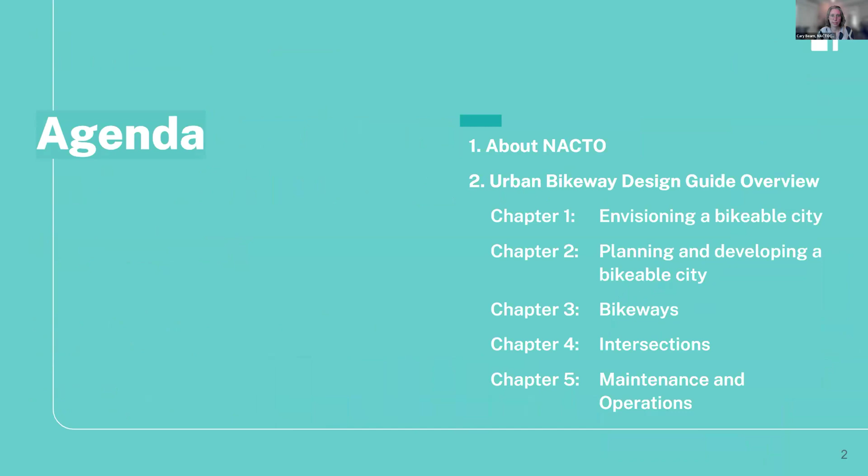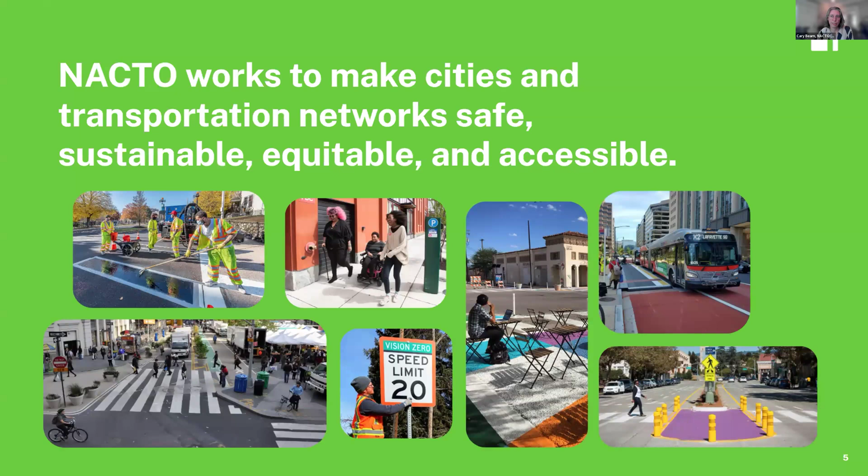NACTO stands for National Association of City Transportation Officials. NACTO is a membership organization of almost 100 transportation departments and transit agencies across the US and Canada. We work with our members and with staff at cities to make their transportation networks safe, sustainable, equitable, and accessible.

At NACTO, we do this by convening, by hosting conferences and workshops. We do this by collaborating, by facilitating fellowships and discussion groups. We do this by curating - that's where we write design guidance like the Urban Bikeway Design Guide, but we also have other design guides and other reports and practitioners' papers. We do this by communicating and elevating city voices in the broader media.

If you are interested in getting more involved with NACTO, especially if you work at a member city or agency, please look into joining us at our conference at the end of May. Registration for that closes at the end of the month, in about a week. It's a great opportunity to learn more about what's in the Urban Bikeway Design Guide, as well as a lot of other things cities are focusing on across the US and Canada.

But what we're focusing on today is what is in this new 3rd edition of the NACTO Urban Bikeway Design Guide. It's been a little over 10 years since the 2nd edition was published, and this is a really comprehensive update. It goes into a lot more detail on topics that were in the previous edition, and it also adds a lot of new topics that had not been previously covered in the last edition.

The guidance is centered around bikeways, and as the title says, it's definitely a bikeway design guide, but there's a lot of guidance that applies to streets in general and making streets safer and more accessible for all users.

The book comes in at just over 400 pages, which is not quite double the length of the previous edition. There's a lot of guidance that's updated to previously published documents, and a lot of new material.

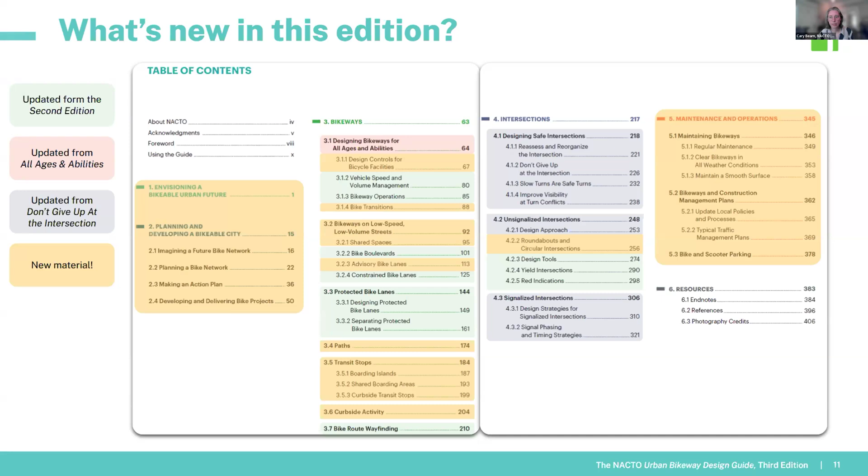Okay, so diving deeper into each chapter. Chapter 1, Envisioning a Bikeable Urban Future. The first chapter sets forth a bold vision for a bikeable city, a city that's vibrant and equitable, economically strong, safe, and sustainable.

But beyond setting the vision, this chapter, and really the entire guide, makes it clear that it's not enough to just say that biking is an important part of the vision. This chapter is aimed at leaders and supporting them with strategies for meaningfully and productively investing in these visions. Updating streets that have not been changed in decades is hard work and requires real leadership.

Organized into 3 categories, investing in organizational capacity means building systems that make the work easier each time. So think about a time you had an administrative or organizational challenge. Have you had that challenge more than once? Was there an effort to address the challenge, or has it just been accepted as part of the process?

Did you tell your leadership about the challenge? Was it addressed? How do you wish your leadership would have handled it? This guide supports strong leadership decisions in addressing these challenges and investing in organizational capacity to make the work easier each time.

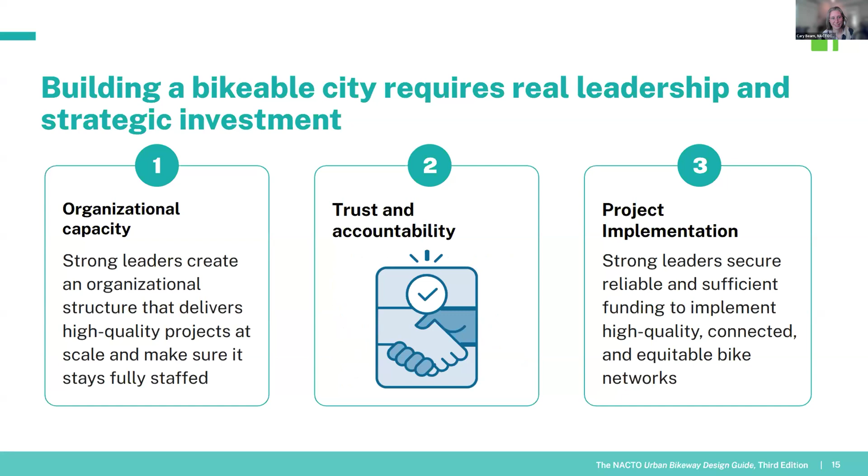Okay, chapter 2 on planning and project development. We're going to be going through just some high-level things. There's a lot in this guide, but moving right along. To build a bikeable city, the bike network needs to be planned strategically and equitably. Not every bike route in a city will serve the same function, and it's important to consider that function when designing bikeway features.

Is a bikeway segment going to be a critical link for the network? Will it be the busiest segment of the network, or will it be an extension into a community that serves fewer people? All those contextual elements will impact design and planning.

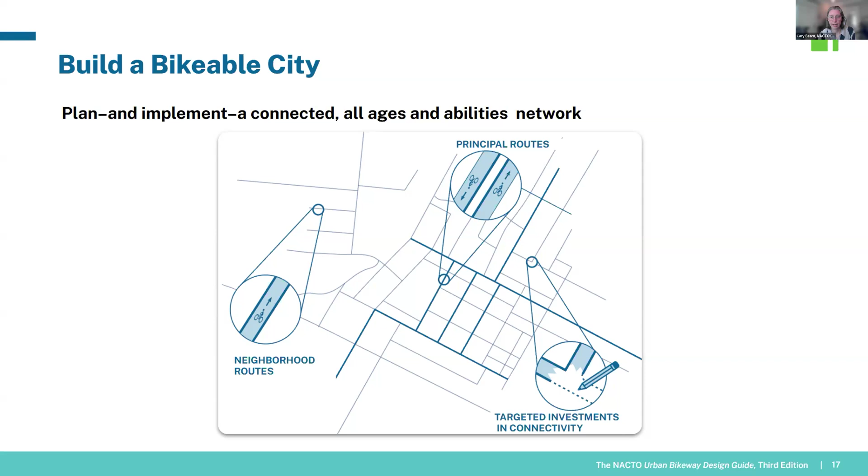This third chapter, the Bikeways chapter, includes a lot of information, of course. I think of it as the mid-block chapter versus the intersection chapter, which is next. And this is where the second edition, the last edition of our book, really started.

So one of the really important updates in this edition was all of the policy, the programmatic, the project development guidance that I've just gone over at a very high level. All of that material, all of the first 60 pages, is new to this edition, setting up the designer for understanding the important context behind the decisions of the technical details.

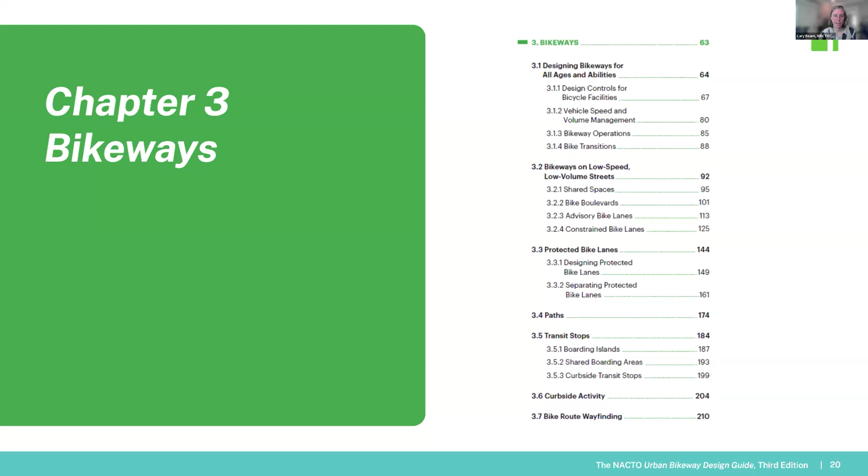This chapter doesn't just jump into facility design details. It starts with foundational principles. We need to design for comfort, and we need to design for the least confident rider, which does not preclude use by the most confident rider. We also need to design for growth.

All ages and abilities bikeways should appeal to current riders and potential riders. They should physically accommodate busyness, wide bikes, and speed differentials, and not just physically but comfortably accommodate that. They should use lasting infrastructure where it matters most, where the most critical safety needs are, or where the most critical gaps in a network are.

We use this term all ages and abilities bikeways. These are designed as safe and comfortable for people of all ages, sizes, physical abilities, and experiences. High quality, connected networks go beyond that by creating a sense of safety and helping people feel as though they belong in a space, that they don't need to ride on a sidewalk, and that they're less likely to have a potentially dangerous interaction with police officers for breaking some standard or legal framework.

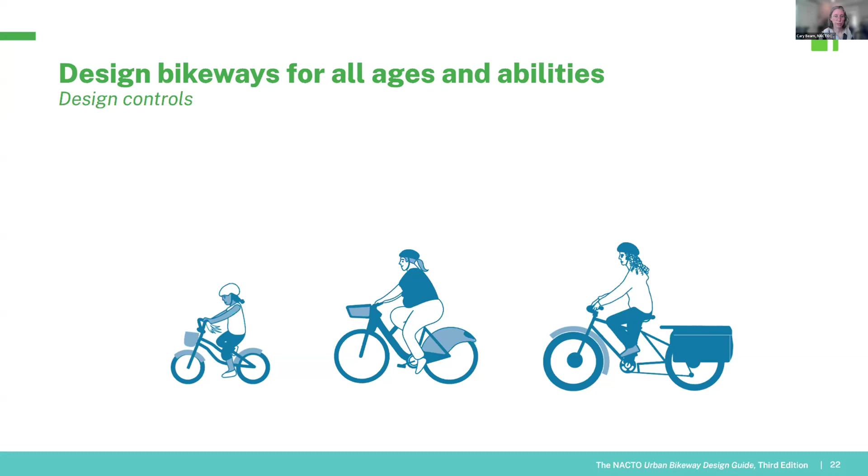Each rider comes with their own backgrounds, identities, preferences, and physical bike size. We need to design not only for the physical space of the bike, but also for the comfortable space of the rider.

A close pass where someone whizzes by you, or a narrow pinch point along a bike corridor, is likely okay once in a while. But if it happens every ride or multiple times a ride, it could be enough to stop a less confident, or even more confident, person from riding.

When thinking about what is comfortable in terms of passing, we need to consider that we all have a minimum and a preferred riding envelope around us when using bike corridors. We have this in all spaces we interact in physically, and different people have different comfort levels with people and objects entering their space.

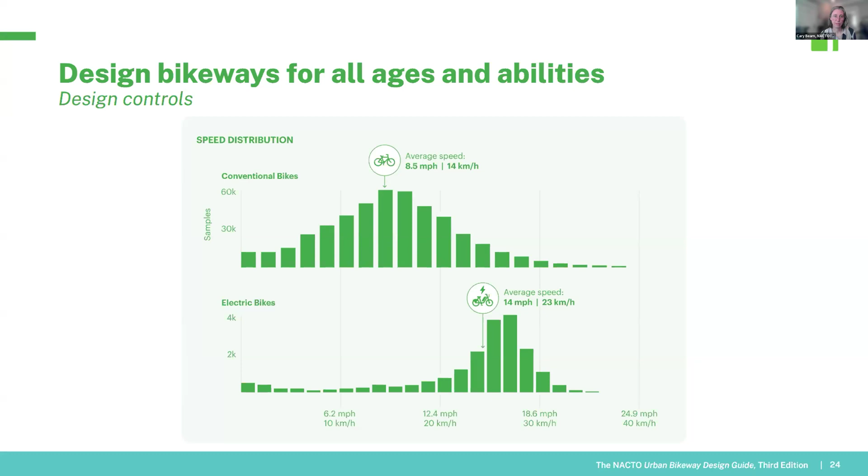The speed we are traveling will impact this comfort, and the speed others are traveling will impact it too. The more speed differentials we have, the more frequent passing occurrences will be. If everyone rode the same speed, no one would ever pass each other. The more frequent faster riders are, the more slower riders get passed, and the more important it becomes for these passing interactions to be comfortable.

If we know that a variety of people riding with different comfort levels and speeds are going to be using a corridor, we need to think about the implications of what it feels like to be passed and to be passing.

People's riding envelopes change based on a lot of factors, and you can see that on any group ride as people ride next to each other—riding farther apart when no one's around, and closer together in crowded places. That's not to say crowded moments prevent riding or totally degrade the experience, but the more those conditions exist, the more stressful a ride becomes.

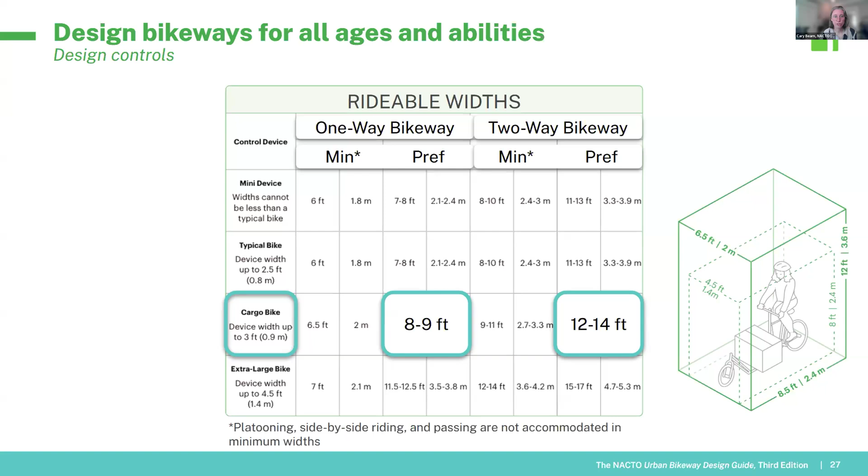I use this term rideable width. Rideable width is a little different from clear width and a little different from marked bike lane width. The rideable width is narrower than the clear width because it does not include the shy distance from curbs and other barriers—we don't expect people to ride right next to a curb or barrier. Rideable widths can be narrower than a marked bikeway depending on configuration, but the marked bikeway could also be unimpacted by the shy distance.

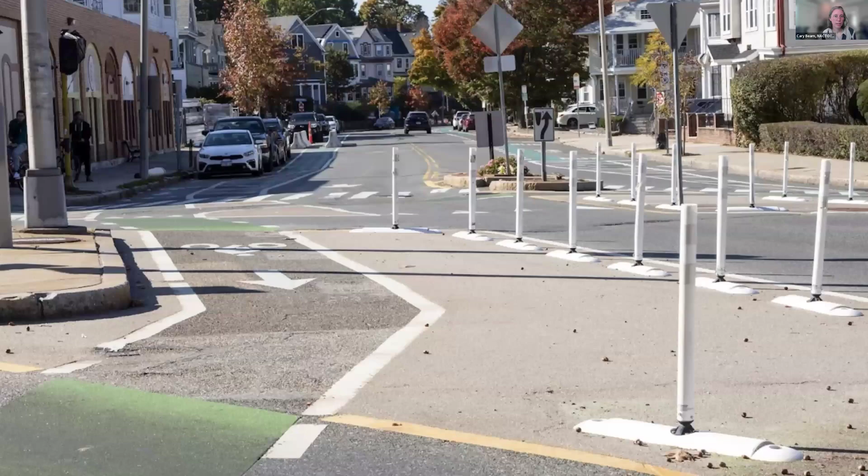Here is a parking protected bike lane with a smooth transition along the curb. You can see the rideable width is wider than the marked area for the bike lane. And through intersections, the placement of the barriers is really outside of the bikeway to delineate the motor vehicle travel lane and does not impede the bike lane at all.

So when it comes to thinking about rideable width and bike lane width and designing these widths, the most critical thing is to always place the barriers to ensure you have sufficient rideable width. You can do that in a lot of different ways depending on how your buffer is configured.

Now that we understand how to think about the rideable widths of bikeways from within the bike lane, we also need to think about what type of bikeway or facility type to select based on the stress and conditions outside of the bike lane, or the motor vehicle context. Protected bike lanes are really the only option along high speed, high volume, multi-lane streets.

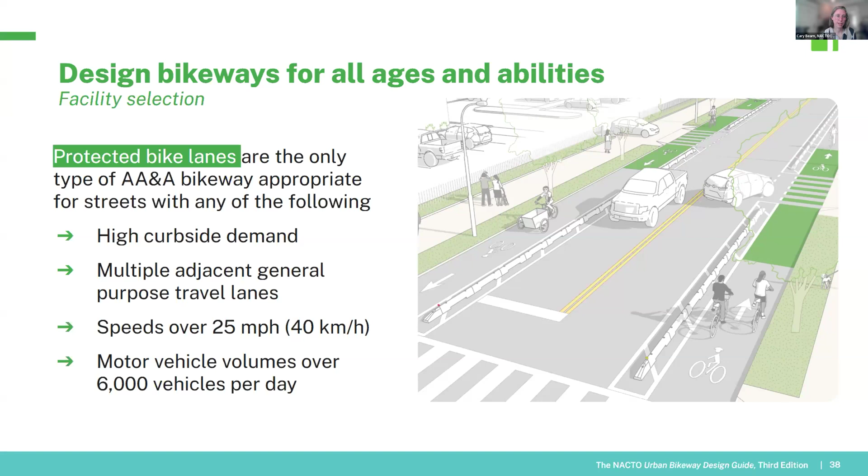If you have any street with multiple lanes, or high curbside demand, speeds over 25, or motor vehicle volumes over 6,000 per day, we're recommending that for an all ages and abilities facility, you need to create the space for a protected bike lane.

The chapter has lots of facility guidance for protected bike lanes and other facility types, but the emphasis in this book is that designers need to use this more technical guidance alongside the design control thinking I just went over—thinking about all ages and abilities rideable widths, considering future potential volumes and speed differentials occurring in a facility, and considering the role the project plays within the network.

All of this comes together to make informed decisions about expanding and connecting an all ages and abilities bike network. This is not a plug and play or one size fits all design guide about putting in certain dimensions and calling it a day.

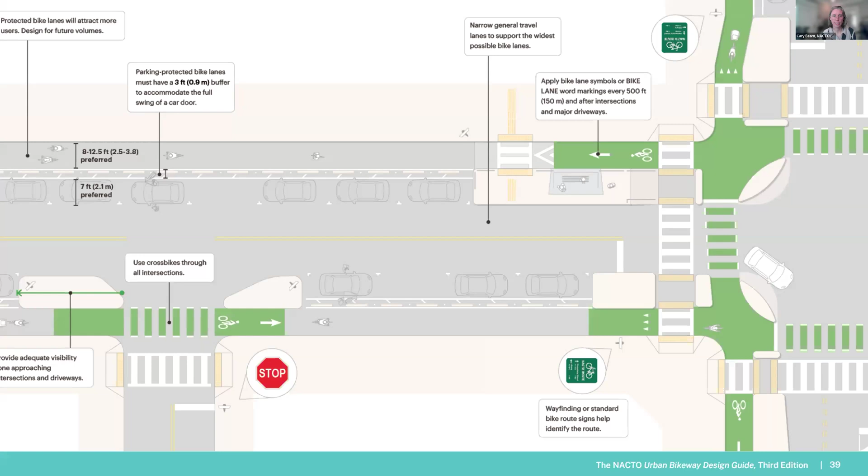Importantly, a street's speeds and volumes are not fixed, and other facility types may make the most sense along low volume and low speed streets. We have lots of guidance here about traffic calming generally and traffic calming specific to bikeways, but traffic calming can and should be part of bikeway design.

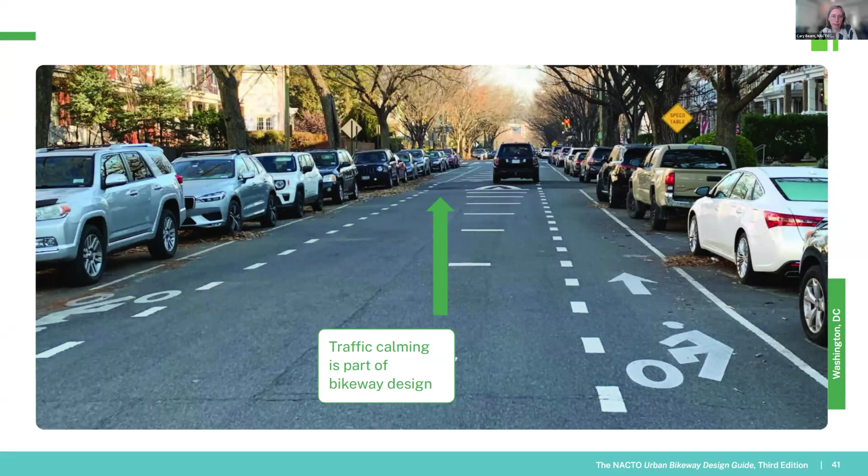This is an advisory bike lane facility type included in our design guidance here, which is appropriate only with low volumes and low speed streets.

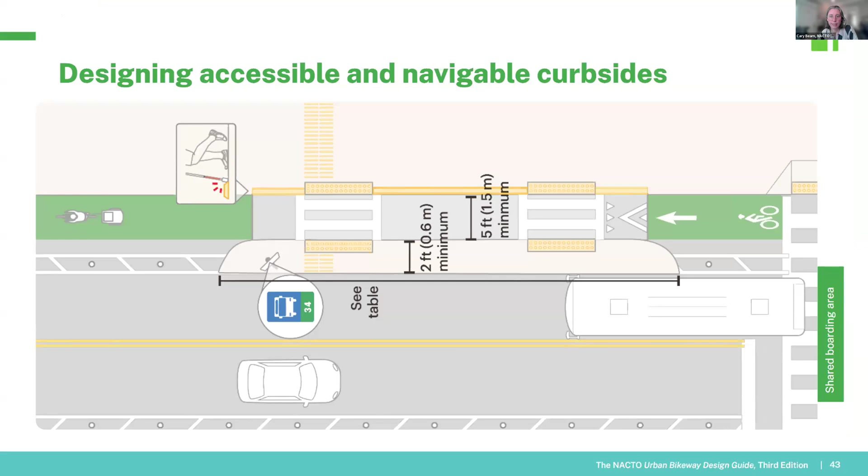We also have guidance in this chapter on continuing bikeways past on-street accessible parking spaces along parking protected bike lanes, really supporting the need for accessible and navigable curbsides.

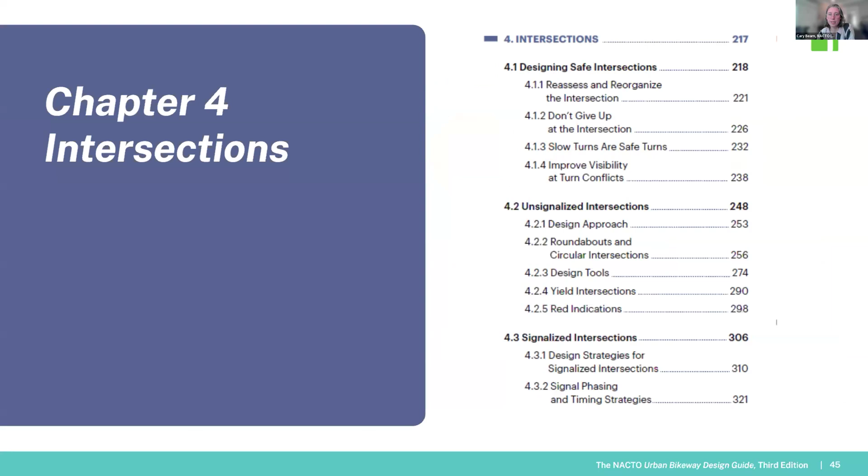Chapter 4—whereas chapter 3, the bikeways chapter, was the mid-block chapter, including the facility types and other features like bus stops and parking—chapter 4 is the intersections chapter, covering intersections of all sizes, like bike boulevard crossings, roundabouts, signalized intersections, and the like.

There are 4 critical principles to intersection design, of all sizes. The first principle is to rethink the intersection and reassess your priorities: what turns need to happen where?

What directions of motor vehicles need to be accommodated? How much delay is acceptable? What is the real priority at that intersection?

We also need to provide distinct paths of travel, making it clear who goes where with what priority. We need slower turns and slower approach speeds, which are critical for safe interactions at intersections. And we need to improve visibility, making sure everyone is mutually visible and has time to react to unexpected behaviors.

A safe system approach uses design tools to minimize the severity of crashes so that mistakes are not fatal, but we cannot expect to eliminate every single potential conflict.

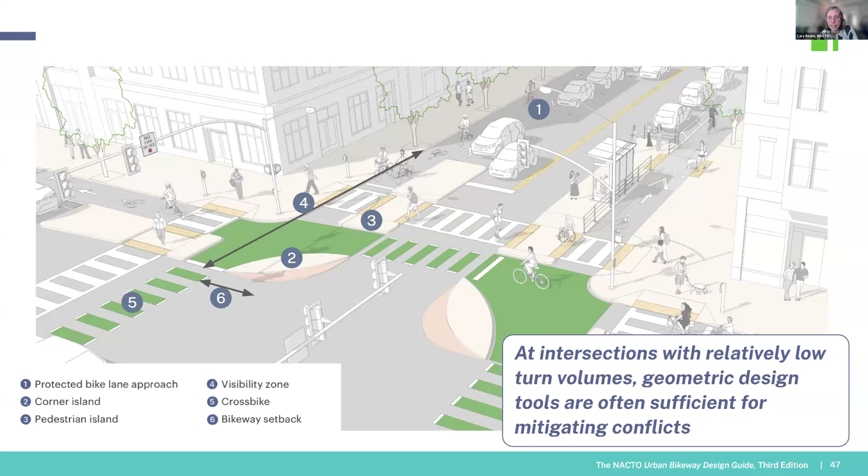For example, the protected bike lane approach and the visibility zone, shown with numbers 1 and 4, support mutual visibility among users. The cross bike markings, number 5 on this diagram, provide a clear path of travel for bikes through the intersection. And the corner island and bikeway setback, numbers 2 and 6, improve visibility and reduce turn speeds.

But at busy intersections, signal timing strategies can fully or partially separate turning vehicles from conflicting bikeway movements, and this edition includes some contextual guidance on when and where to use that phase separation.

I think this is a really exciting piece of our design guide, and we have a training at our conference in a month called Designing Bikeable Intersections, where we will get into more of the detail behind the thinking of this kind of technical guidance.

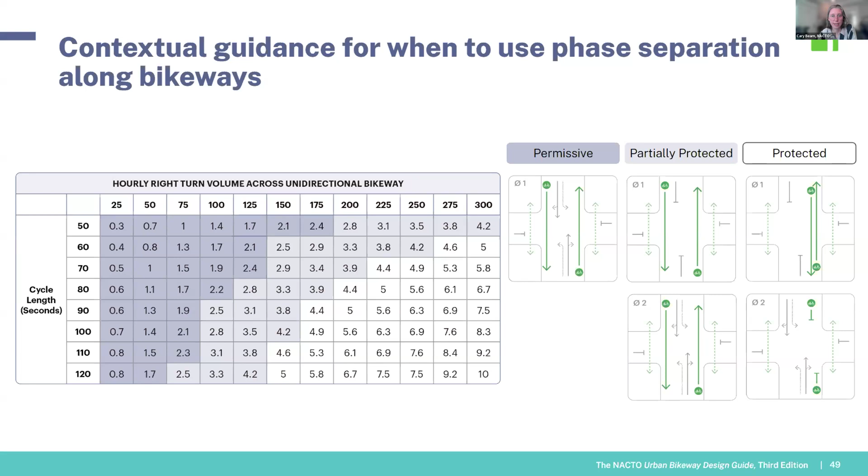But finally, we wrap up the guide with a chapter on maintenance and operations. When it comes to keeping bikeways clear, we really have to think about how these practices will be iterative. We can't let perfectionism impede progress, but we can continue to expect better.

So when we start small, we evaluate and we update protocols. That's how we build these practices into our work. And collaboration across teams is essential for this.

Leveraging expertise of people in all departments will identify locally preferred practices. And as we progress with strategies for keeping bikeways clear, it's important to celebrate success and communicate challenges transparently to continue to build that trust.

Of course, all materials require some amount of maintenance, and we need to, as designers, try to anticipate maintenance needs during design. That means considering the speed and frequency of potential traffic incursions, and it also means understanding the implications of existing conditions.

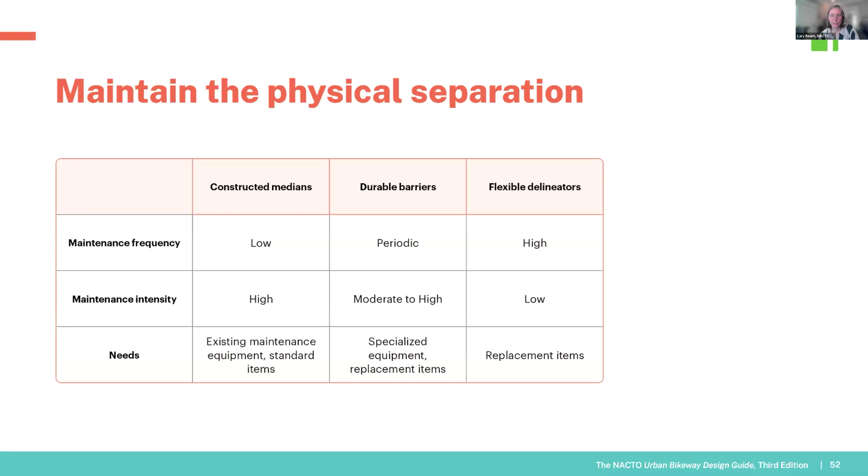And that we should never be intensifying inequities. In other words, don't let a bikeway fall into disrepair in an area that has already been disinvested in. We need to invest in better protection and more frequent maintenance where it's needed, and that might be to address inequities, or that might mean to harden protection along a high volume turn corner.

Finally, we as a profession need to do a better job committing to keeping bikeways operational during construction and other closures. This chapter supports with guidance on policies, practices, and designs that address a variety of common closures.

And although individual closures are temporary, we can remember that construction itself is not temporary, and it's instead a permanent condition with temporary location. So investing in these practices and policies is a long-term strategy for keeping the network clear and connected.

Okay, that's the guide in a pretty small nutshell. And I want to close by emphasizing that this edition is more than just a set of dimensional requirements that get put together to create a facility, but instead this guide is a blueprint for thinking really critically about designing streets for people, addressing the needs of a location, and selecting the design tools most appropriate for addressing those challenges.

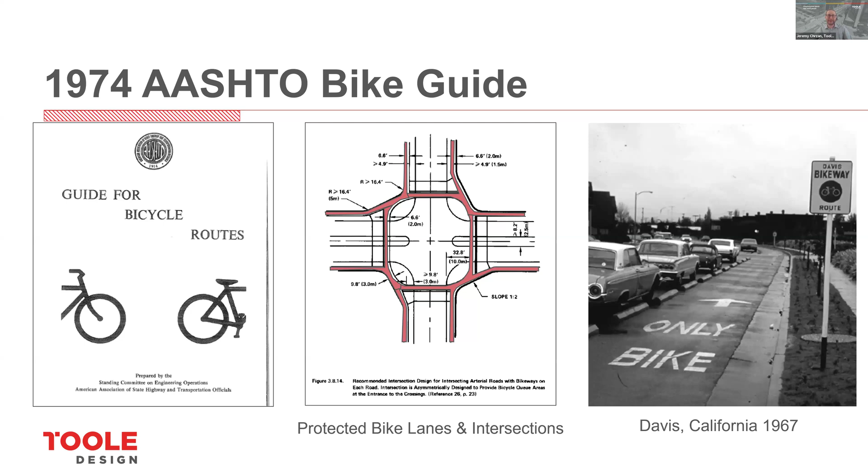Why is that? The 1974 edition of AASHTO actually had a lot of the things that are included in this guide, like parking protected separated bike lanes and protected intersections. It highlighted that you shouldn't drop bike lanes at intersections and you should mark bike crossings. It talked about the benefits of two-stage turn boxes and protected intersections to mitigate right hooks.

But unfortunately, vehicular cyclists got upset with some of the mandatory use laws that were also being enacted and felt like they were losing their right to the road. And they got heavily involved in the AASHTO process. So when the 1981 edition came out, all of that good stuff was removed in favor of things like wide outside lanes.

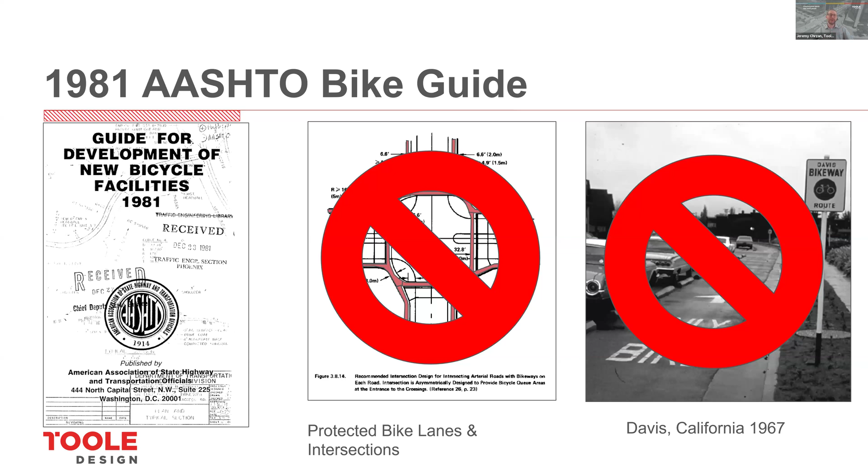But as we kicked off this project, both NCHRP and AASHTO gave us guidance that this document needed to meet the needs of people who either can't drive or choose not to drive, while also recognizing that we needed to be flexible to the individual communities and locations where these facilities are being installed. In short, our design user is changing from that highly confident bicyclist to people of all ages and abilities, or what we referred to as the interested but concerned bicyclist.

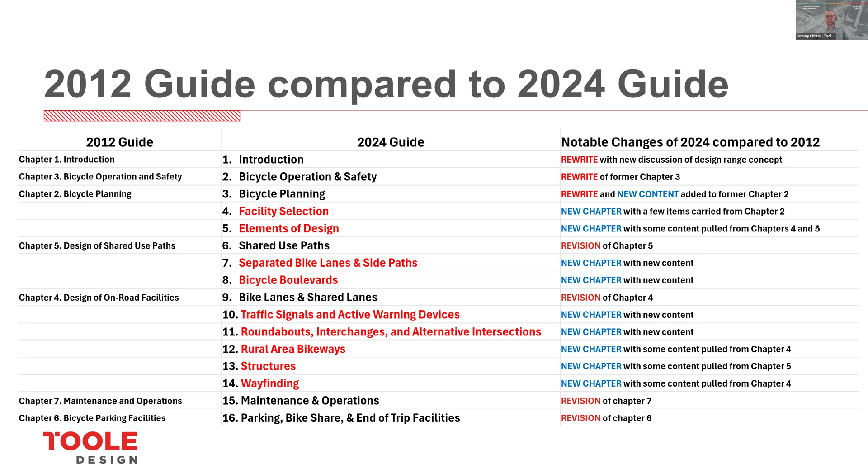So jumping into the guide itself, this is the structure or layout of the guide. There were a lot of changes since 2012. We did a lot of revamping of the structure of the guide, really with the focus on making this more usable for practitioners. There are 625 pages of content, so the length of the guide did increase, with 9 new chapters. But all of that extra pages is not just text. We also have 3 times the number of figures, so 230 figures in this document, and 2 times the number of tables and charts, again, to put details right at people's fingertips and make the guide easier to use.

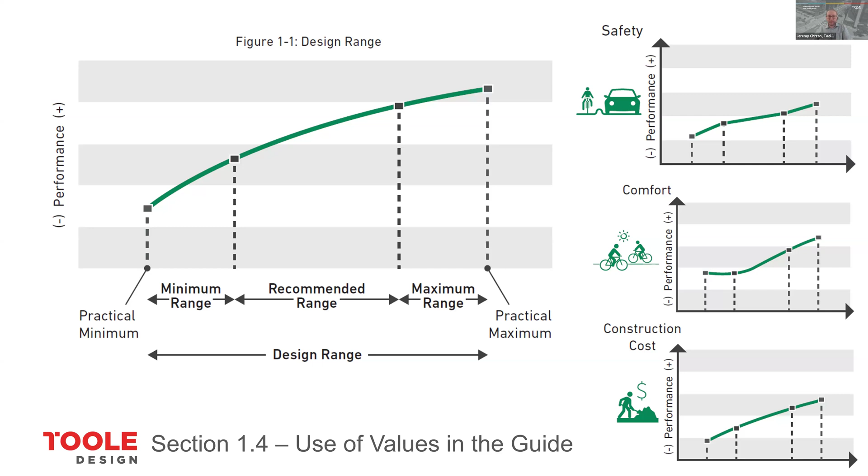So let me just jump right in. Chapter 1 provides the introduction to the guide. Please do not overlook this chapter, as it really does establish the framework of all the content that follows. It talks about our approach to design values that are used throughout the guide and this concept of design range, and that really designers should be picking values in a recommended range while also understanding the flexibility they have to deviate from that. So we make it very clear that selecting values in the minimum range is likely to diminish mobility, safety, and comfort. So it is something that we can use in a constrained condition, but is not our default.

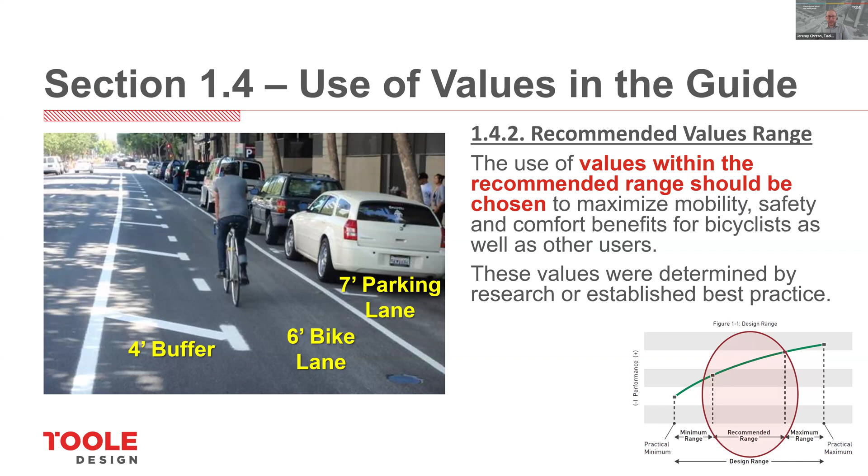Instead, we want to select values in the recommended values range. This is going to best meet the needs of our design users and address that safety and comfort.

People ask how this document relates to other design guides. In chapter 1, I think we only mention the MUTCD, the AASHTO Green Book, and PROWAG. However, there are lots of guides, including NACTO, that should be used in conjunction with the bike guide. Really, these are all complementary documents working to achieve this goal of meeting the needs of the interested but concerned user.

The AASHTO team scrambled to make updates to the AASHTO Bike Guide, as the 11th edition of the MUTCD was released a few weeks or months before the AASHTO Guide came out. They did a good job making most of the changes, but you'll find some inconsistencies, like use of the 'bikes may use full lane' sign instead of 'bikes allowed full use of lane,' or use of the helmeted bicyclist in all the figures. But by and large, the guide addresses the updates to the MUTCD.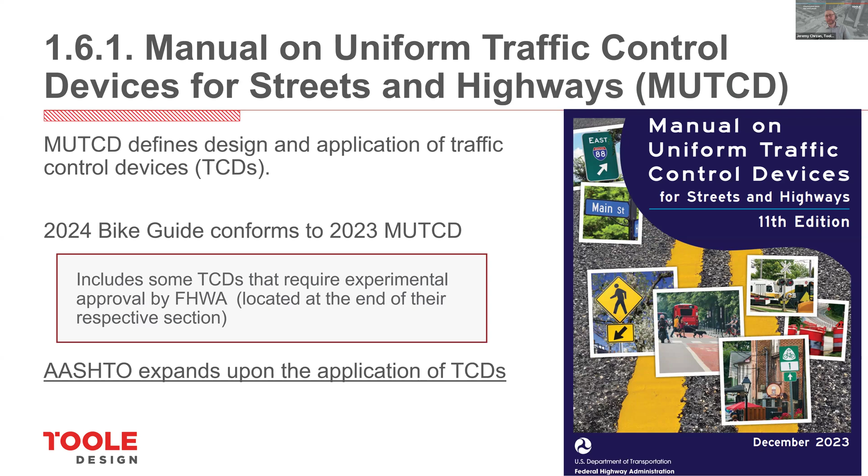With regards to the MUTCD, this is the first AASHTO bike guide that gives any guidance on treatments considered experimental. We flag this in the guide with gray boxes around treatments that require a request to experiment from Federal Highway. But it's great that those are included in this document.

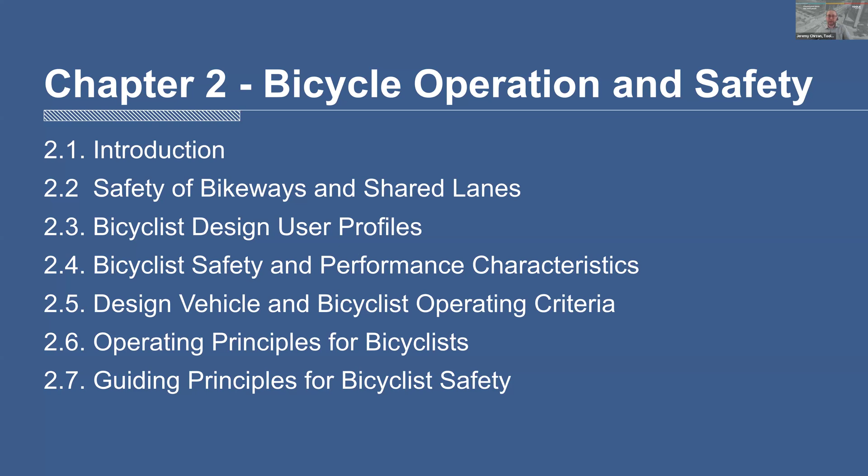Chapter 2 is probably the most research-heavy document, with at least 80 citations in this chapter. It really relies on a safety-based focus to the recommendations throughout the guide. Here we talk about the relationship between perceived comfort—the comfort people feel when traveling along a facility—versus the actual or substantive safety of those locations.

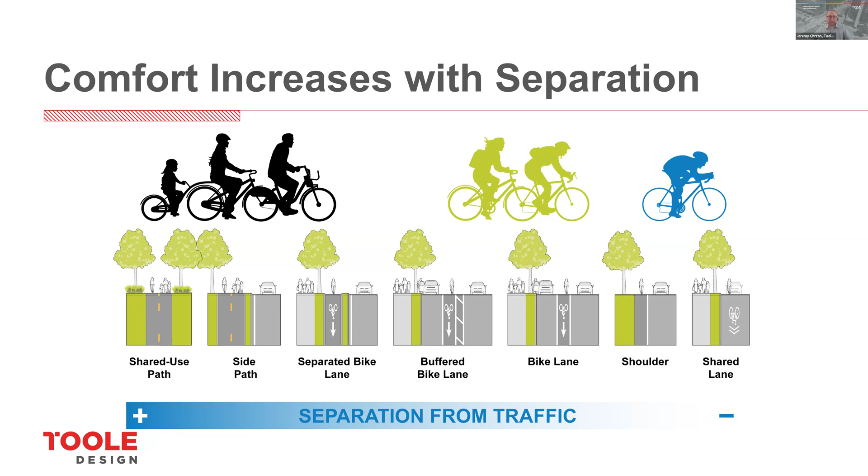This photo really does a great job illustrating that a person biking with children is much more comfortable on a wide sidewalk than in a bike lane on a 40-mile-an-hour roadway. This draws attention to the idea that as volumes and speeds of motor vehicles go up, there's a greater need for separation from that moving traffic to address the needs of the design user.

We also talk about the safety in numbers principle, that a bicyclist's risk actually goes down as the volume of users increases. By providing more safe and comfortable facilities, we're encouraging more biking, which is more likely to lead to safer interactions. As I said, our design user is that interested but concerned user—they make up the greatest percentage of potential bicyclists, and if we design for them, we'll also naturally accommodate the somewhat confident or highly confident bicyclists.

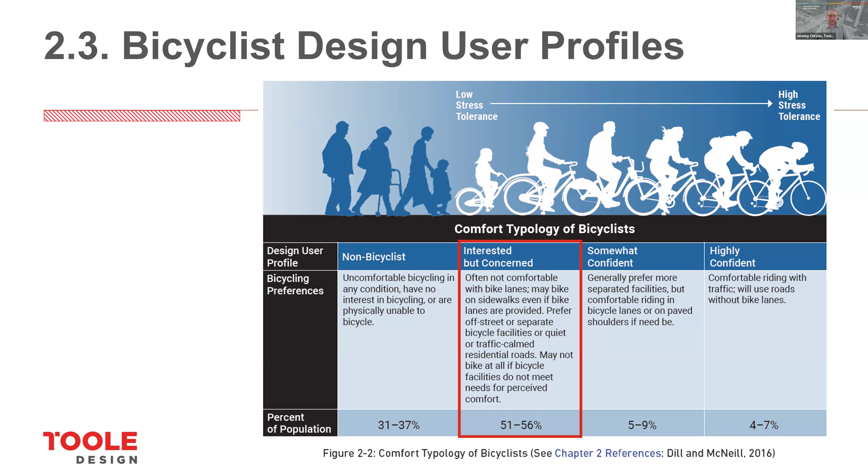We also give a lot of information about the guiding principles of design, driving home the point that separated bike lanes are preferred over striped or shared lanes, that one-way separated bike lanes are generally safer than two-way separated bike lanes, and that two-way separated bike lanes on a one-way road are preferable on the right side over the left side. This is also the chapter where you'll see the buildup of physical, operating, and shy spaces that we use to develop recommendations throughout the chapters ahead.

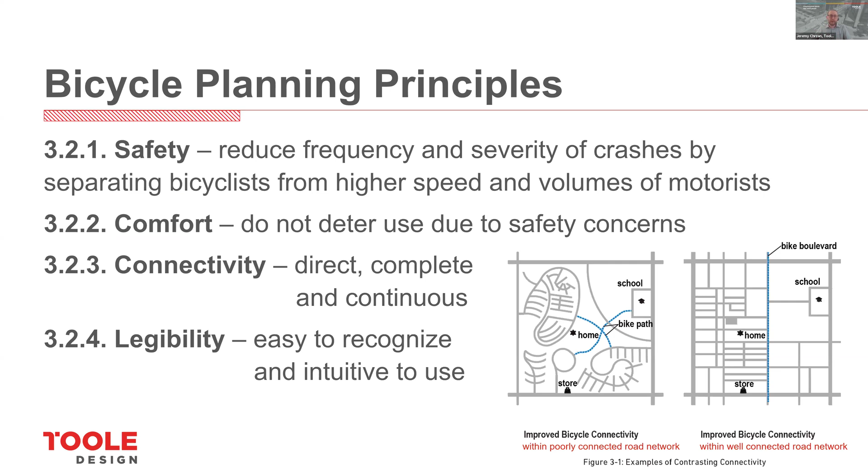Chapter 3 is bicycle planning. The principles we identify in this chapter are safety, comfort, connectivity, and this concept of legibility—that our bike network should be intuitive and easy to follow without significant workload from somebody traveling along there. This chapter also talks about the different ways we can analyze our bikeways, drawing heavily on level of traffic stress, though we do discuss bicycle level of service in a more rural context.

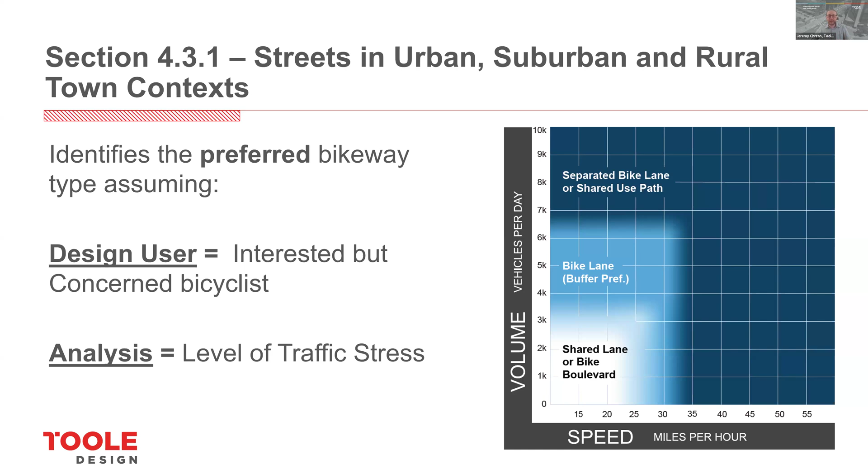Chapter 4 gets into bikeway selection, or choosing your bikeway type. This really mirrors a lot of the content you'll see in Federal Highway's Bikeway Selection Guide, again driving home the point that if we're designing for that interested but concerned bicyclist, we should use level of traffic stress to assess what facilities will be safe and comfortable. Generally, as volumes and speeds increase, there's a greater need for separate facilities.

In the rural context, we do rely on the bicycle level of service analysis, recognizing that more often than not, the highly confident bicyclist is our design user in rural settings. But it doesn't preclude you from designing for that interested but concerned user and using level of traffic stress.

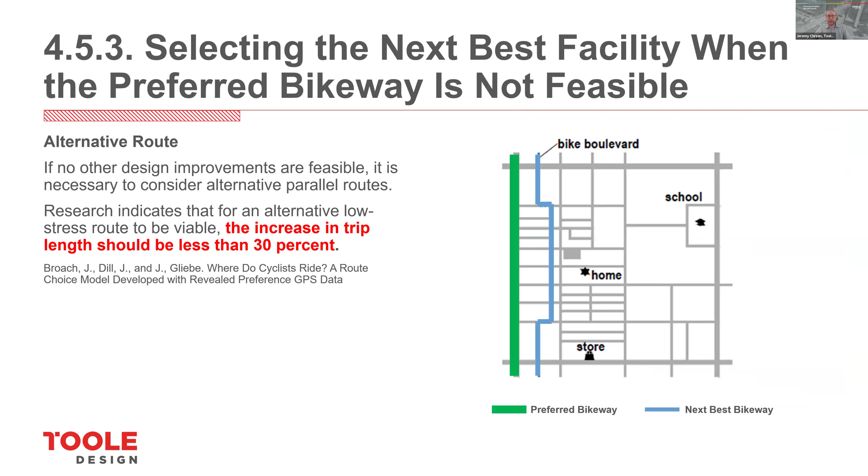We also discuss the different strategies you can use in constrained environments to deal with trade-offs, and how to actually find space for recommended facilities, while drawing attention to the fact that sometimes, based on project context—like a simple mill and overlay—we can't find enough width, and there may be a need to look for an alternate bike route that meets the needs of that design user.

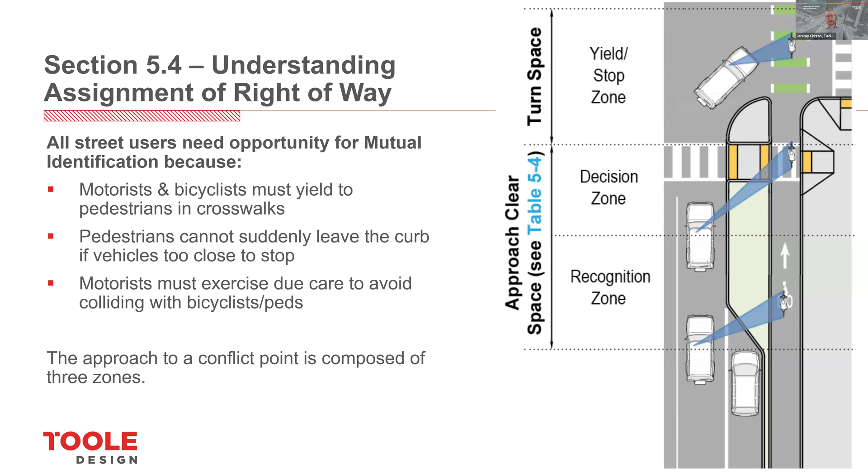Chapter 5 is one of the most important chapters in the guide. This is where we discuss sight distance and common topics applicable to many different bikeway types. We really didn't want to repeat the same thing over and over in each chapter, so it's all combined into this chapter 5, elements of design. We talk about understanding right-of-way on our roadways, and how different users have the right-of-way at different conflict points.

We talk about stopping sight distance. In addition to giving you the formulas, we provide a lot of lookup tables so that you don't always have to do the math. You can just go to the tables themselves.

We also draw attention to the fact that there are situations where conflicts are expected between users, like at intersections, where bicyclists are more likely to react quickly, whereas there are other locations with less expected conflicts where we should use a larger perception reaction time.

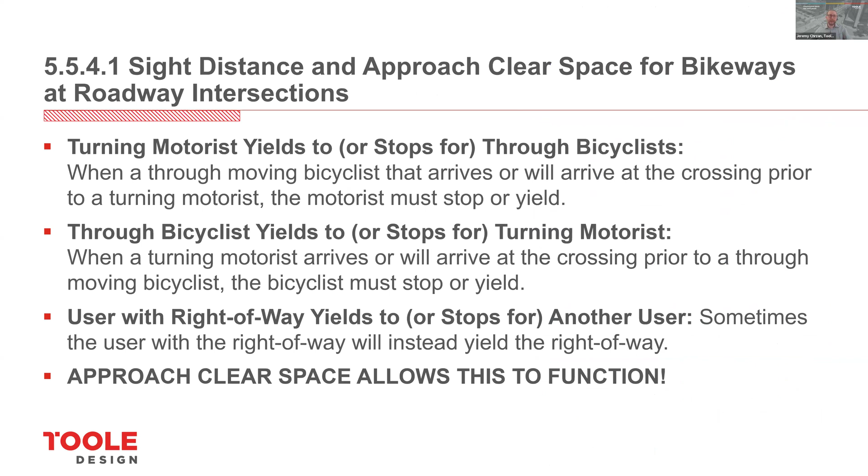There are situations where one user has the right of way versus the other. As we look at shared use path and protected intersection approaches, this idea of approach clear space is what we developed to identify what space is needed on the approach to an intersection so that both users can see one another and see which user will reach the conflict first and therefore has the right of way. This is all contingent on how we design those corners and how quickly we can slow turning motorists to address these conflicts.

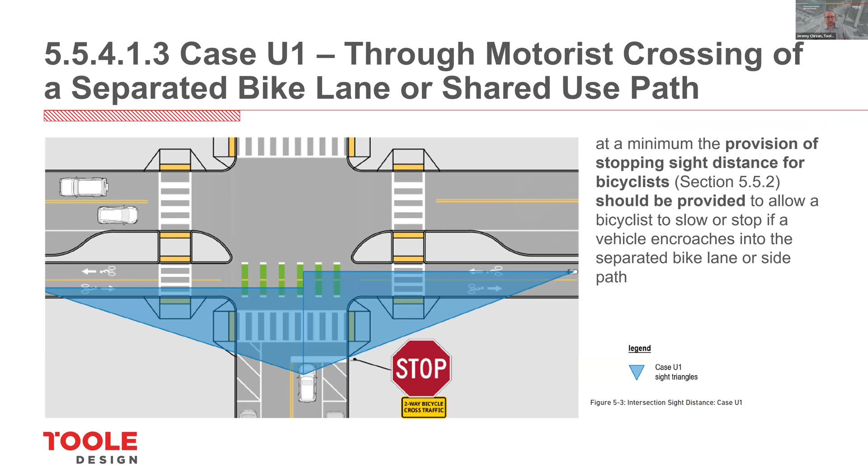We also give a lot of sight distances for separated bike lanes. For example, case U1, where a motorist is crossing a separated bike lane from the near side of the street. Case U2 covers the opposite, where they're crossing from the top side of this image and crossing the bikeway on the far side. We actually have this variation of sight distance as well.

It's more discussed in chapter 7, but I want to highlight it here: there are certain times where the motorist will inch forward into the crosswalk after they've seen there aren't pedestrian conflicts, then look for bike conflicts. If there are none, they inch forward to the point where they can see approaching motorists.

We give a lot of sight distances for shared use paths, also trying to draw attention to the fact that with the appropriate sight distances, we do not need to stop control our shared use paths. If both users have enough sight distance, installing unnecessary stop signs is really not necessary.

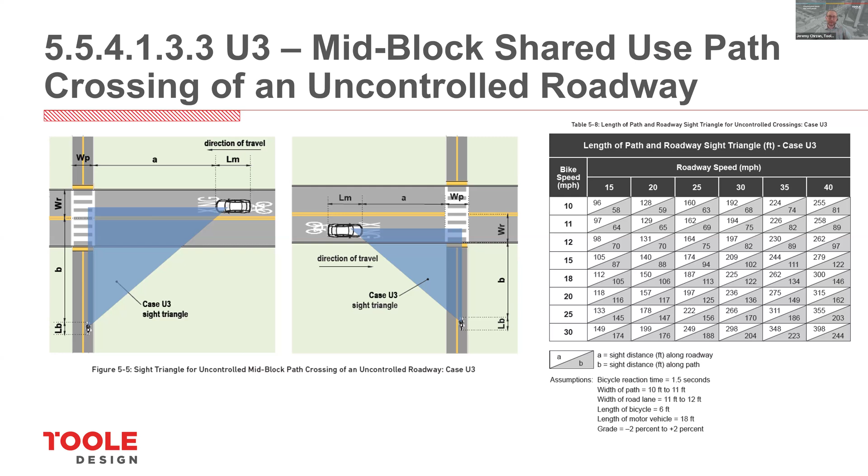And again, the handy dandy lookup tables so that you don't have to do all the math of the formulas we provided. Sight distance for horizontal curves on shared use paths is very similar to what you'll see in the previous edition. This chapter is also where we discuss intersection design objectives.

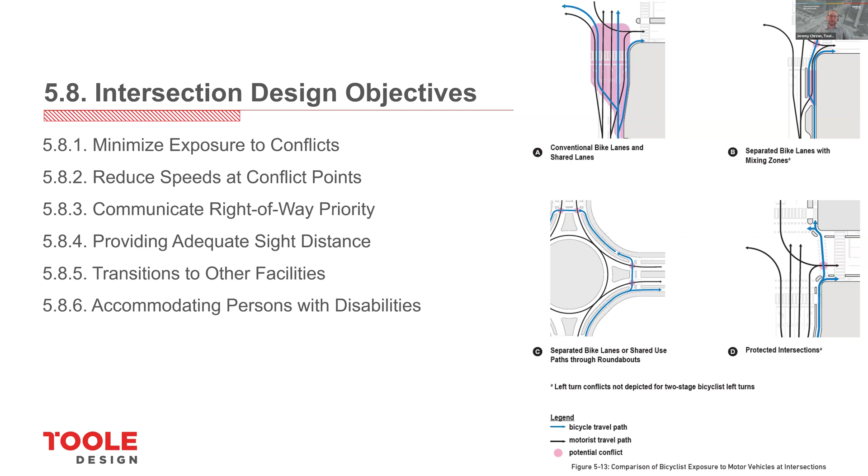So reducing exposure, reducing speeds, communicating right of way, and also recognizing that intersections are the places where transitions from one facility type to another are most likely to occur for bicyclists, and how do we handle those locations.

We also talk about issues of bicyclists trying to cross challenging collector and arterial roads, and this recognition that motorists are less likely to yield as the number of lanes or the speed or both of those roads increase. This draws attention to the fact that we may need more countermeasures to allow bicyclists, let's say on a bike boulevard, to cross a challenging arterial street.

Building off what you might see in FHWA's STEP guide for pedestrians, we provide a similar table that identifies a certain tier of countermeasures that may be appropriate based on the conditions of the roadway that those bicyclists are trying to cross.

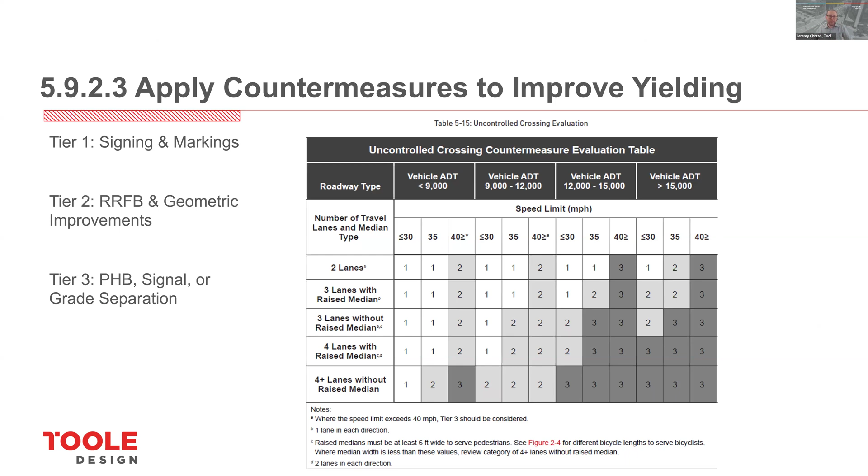As I said, we also discuss intersection design and safety within this chapter, drawing attention to the fact that at protected intersections, we can use things like mountable truck aprons to slow turning vehicles.

We can use things like raised crossings to, again, slow turning vehicles, also elevate pedestrians and bicyclists and help make them a little more visible.

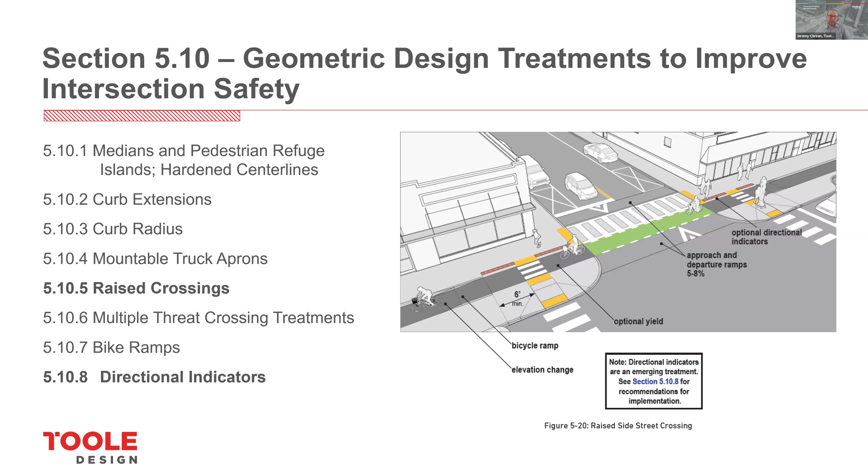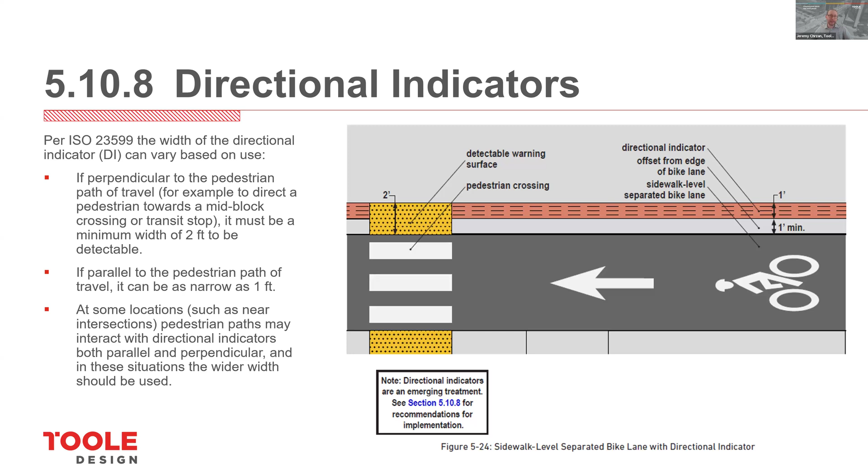In this chapter, we talk about the use of directional indicators along sidewalk level separated bike lanes. We also drive home the point that sidewalk level has these challenges of pedestrian accessibility that should not be overlooked in the design process.

Closing out chapter 5 is where we highlight the various signs and markings that can be used to delineate or help communicate to bicyclists, things like bicycle crossing markings, two-stage turn boxes, etc.

Digging into the actual facility types, chapter 6 covers shared use paths. There's not a whole lot that's different in this from the previous edition, but we do try to drive home the importance that the volume of users expected should really be the deciding factor in how wide our shared use paths would be.

Again, we do not provide a default width for shared use paths, but we make it clear that if you do a 10-foot wide shared use path, you're really only providing 2 operational lanes for users, and a simple change to at least 11 feet will give us 3 operating lanes, allowing shared use paths to operate more efficiently at higher volumes.

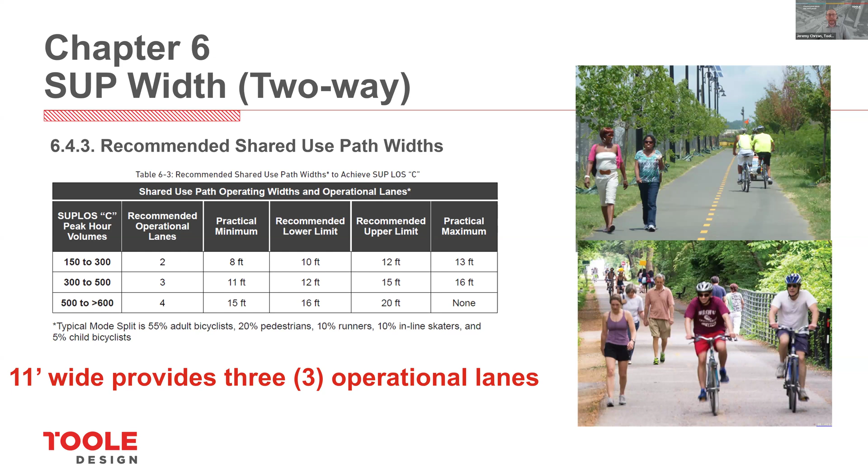A lot of this is built off of Federal Highway's shared use path level of service calculator tool. So again, we have a handy lookup table to look at based on your volume of users and your widths, what would be that shared use path level of service.

And at some point, based on the volume and mix of your users, it may be appropriate to separate pedestrians and bicyclists into their own separate spaces.

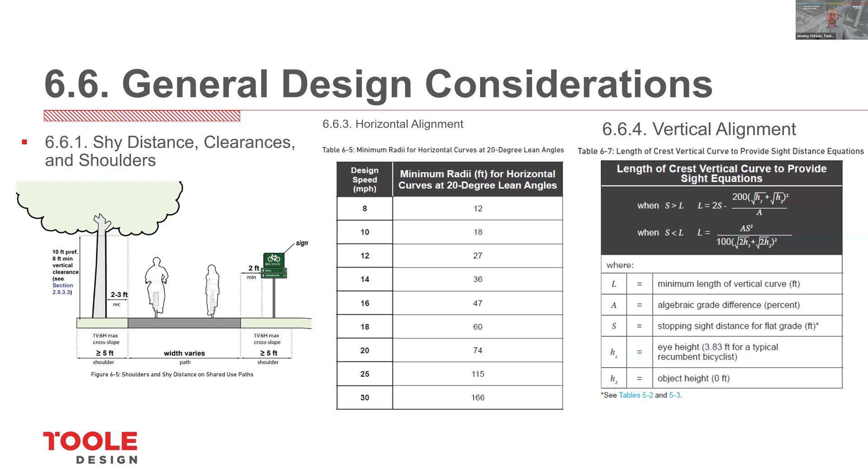We talk about the shy distances and adjacent facilities that you need along a shared use path, all those horizontal and vertical alignments. Though again, we give you the lookup tables so that you don't have to do the math.

And then we also give the various intersection approach treatments that you might use for a shared use path that's crossing mid-block. Again, driving home the point that the unnecessary installation of stop signs should be avoided unless they're absolutely needed.

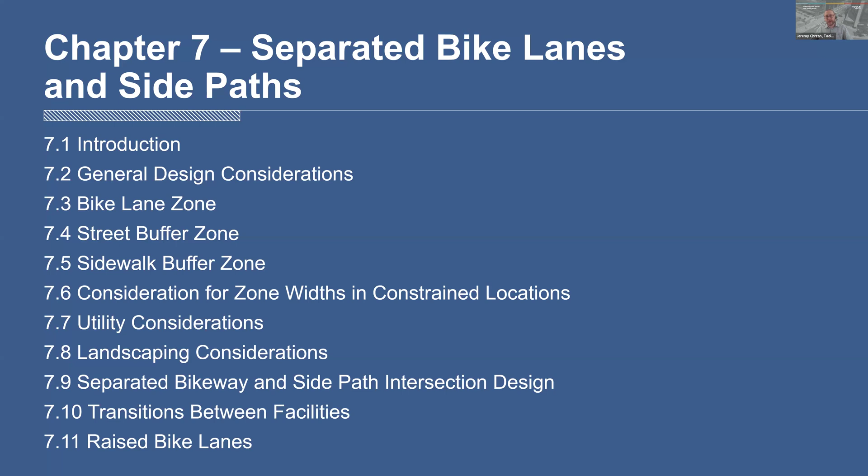Chapter 7 covers separated bike lanes as well as side paths, since there's a lot of similarities between a shared use path running parallel to a road and the characteristics of a separated bike lane. So we talk about the different zones and spaces that are needed, not just the separated bike lane space itself, but the street and the sidewalk buffer.

We talk about the different elevations at which a bikeway can be installed: at street level, at sidewalk level, or at an intermediate level between street and sidewalk level. And again, we talk about the trade-offs associated with pedestrian accessibility with those design treatments.

Similar to what Cary was talking about, we really build in this idea of shy space into the widths provided in the guide. So based on the conditions you have, are you between 2 vertical curbs, in which case you're going to need more curb-to-curb width, versus a facility that might be at sidewalk level or adjacent to sloping curbs where those shy distances are essentially non-existent.

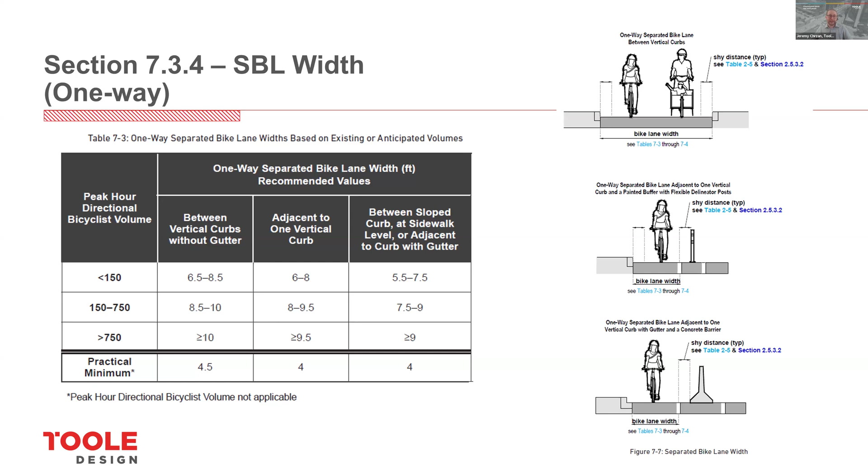We also talk about how you drain, how you deal with the stormwater associated with separated bike lane implementation, and that there are a lot of different strategies that can be employed based on the type of project that you're implementing.

Section 7.9 discusses intersection design and this concept of protected intersections. As I said, separated bike lanes and shared use paths have similar characteristics, and you can see the characteristics of a protected intersection are very similar for those 2 facility types.

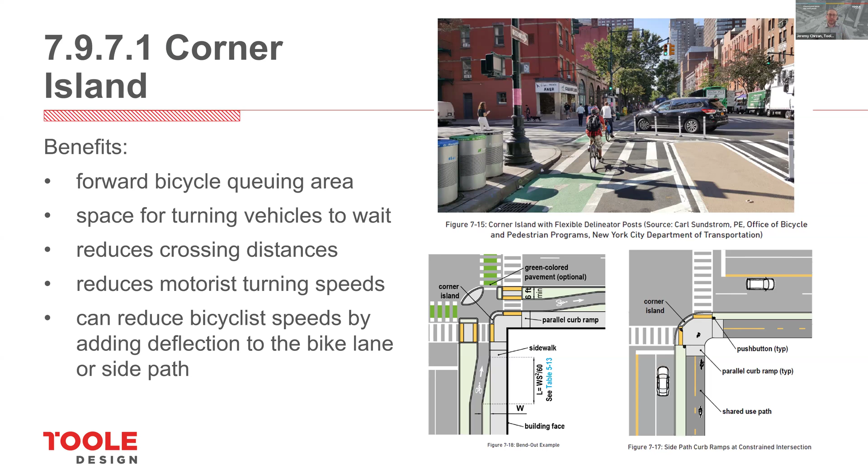And then we dig into the details of some of the elements of those protected intersections. So the corner island, what is the purpose of that? It's the thing that's going to give queuing space for bicyclists, and it's the thing that's going to slow turning motorists and get them to yield and better respond to crossing bicyclists.

We talk about how not all locations will be able to have a protected intersection. So if we are doing mixing zones or dedicated right turn lanes, generally we want to keep those right turn lane lengths as short as possible so that motorists entering those spaces are entering as slowly as possible, as close to the intersection, and that we can use flex posts and buffers between the right turn lane and the through lane to further reinforce that motorists need to enter those spaces more slowly.

We also discuss how to accommodate accessibility with separated bike lanes. This is an area where PROWAG was released and the graphic doesn't necessarily reflect the guidance in PROWAG. So really this is more illustrative of the type of treatment you would have to deploy to both meet PROWAG as well as accommodate the separated bike lane.

We talk about how to accommodate transit and separated bike lanes with the design of floating bus stops. Lots of different variations of this are discussed in the guide, understanding that some will be designed as a retrofit, some will be designed as a reconstruction. How do you deal with those different types of interactions?

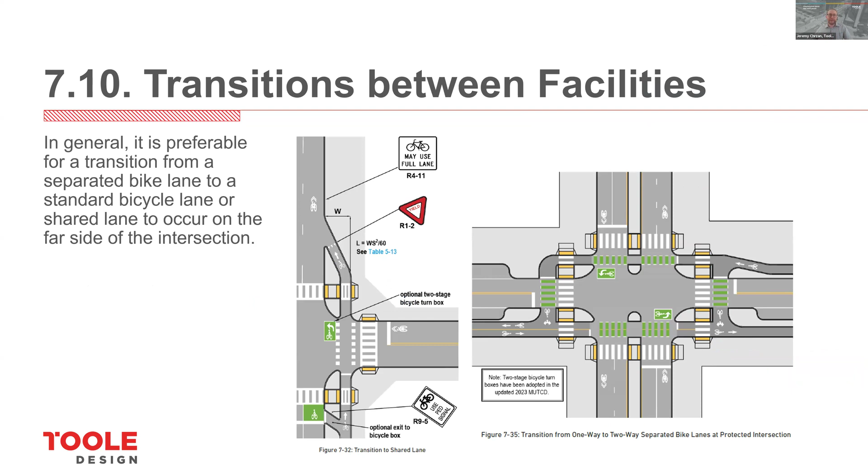And then separated bike lanes have some unique challenges in dealing with transitions from one facility type to another, particularly two-way separated bike lanes. So while we can't possibly show you all the different transitions, you'll find a lot of different examples of transitions in this chapter.

We also discuss this idea of a raised bike lane, which is sort of a hybrid of a conventional bike lane and a separated bike lane, really only appropriate in our most constrained conditions, but it does have its place in the design guide, and we provide you the information needed to design that.

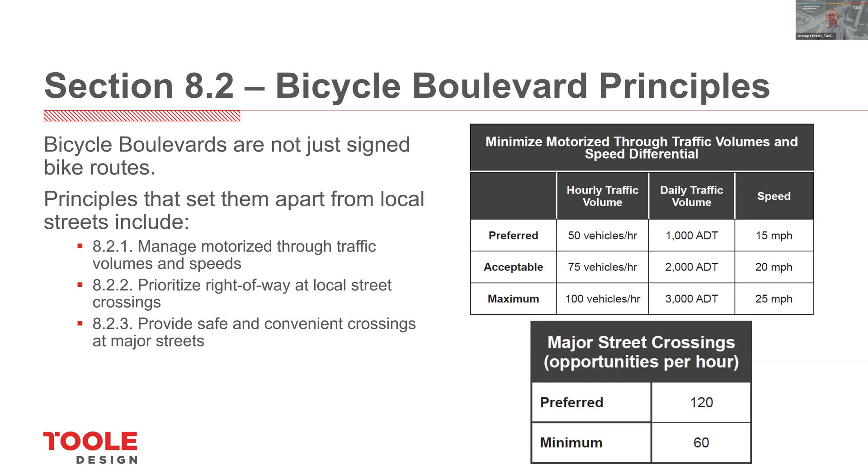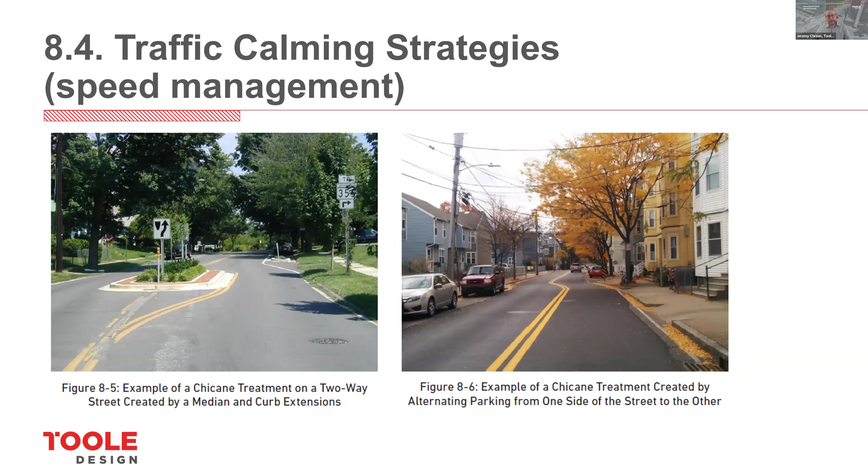Chapter 8, bike boulevards, planning and design of that facility. So showing you the target volumes and speeds to allow this to be safe and comfortable for that interested but concerned bicyclist, as well as some of the traffic calming strategies. That's not just vertical deflection, but also horizontal deflection, things like medians and chicanes, and they can have a benefit of helping to control motor vehicle speeds if they're slightly above what's desirable.

Similarly, if the volumes are higher than desirable, we can consider traffic diversion strategies. So we give a lot of different options for traffic diversion, which is intended to reduce the motor vehicle volume slightly just to get us below those more comfortable thresholds.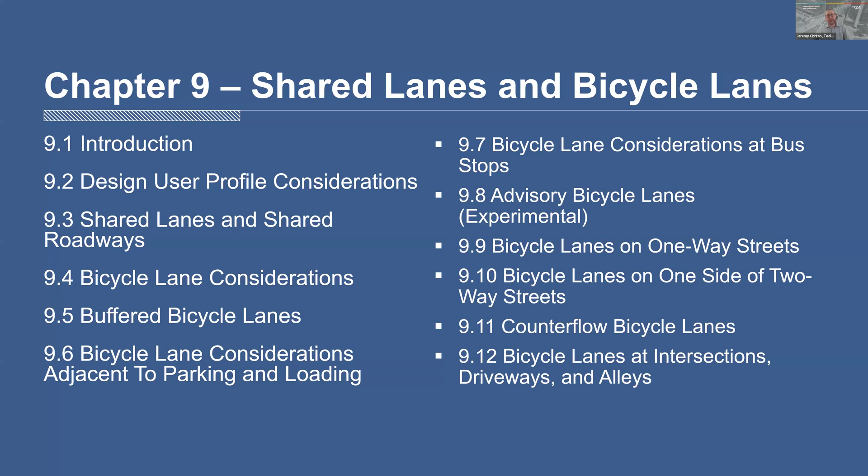We also know that bike boulevards aren't always straight and that they might have offset intersections and other unique geometry that we're trying to accommodate. So we give you some examples of how to deal with some of those transitions at some of the challenging locations. Chapter 9 covers shared lanes as well as conventional bike lanes for various contexts.

So we do talk about the installation of shared lane markings. We give guidance on the widths, again, recommended as well as practical minimum widths for conventional bike lanes, recognizing that those widths should respond to the types of conditions that we're biking along, and that biking along on-street parking versus biking along just an edge of pavement have slightly different width requirements that we should be considering.

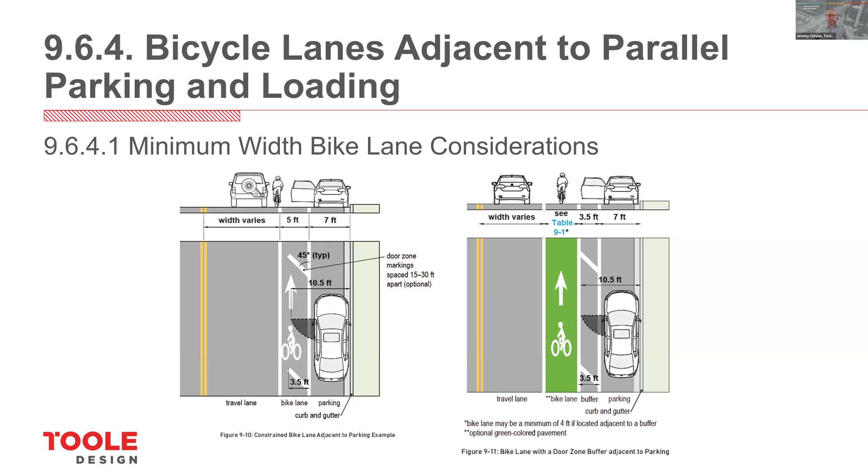We know the challenges of bike lanes installed in the door zone, so we give some guidance on door zone markings that can be considered in our most constrained conditions, while also highlighting that buffers can provide a much better benefit to deal with this door zone issue. And then again, we talk about some experimental treatments. So advisory bike lanes are discussed in chapter 9.

We also talk about that at some complex intersections or locations with high volumes of right turning motorists, there may be situations where we want to give an option for a bicyclist to exit from the bike lane to an adjacent shared use path so that they don't have to deal with those motor vehicle conflicts. Probably most appropriate in a suburban context, but again, giving you the tools to consider that as a design option.

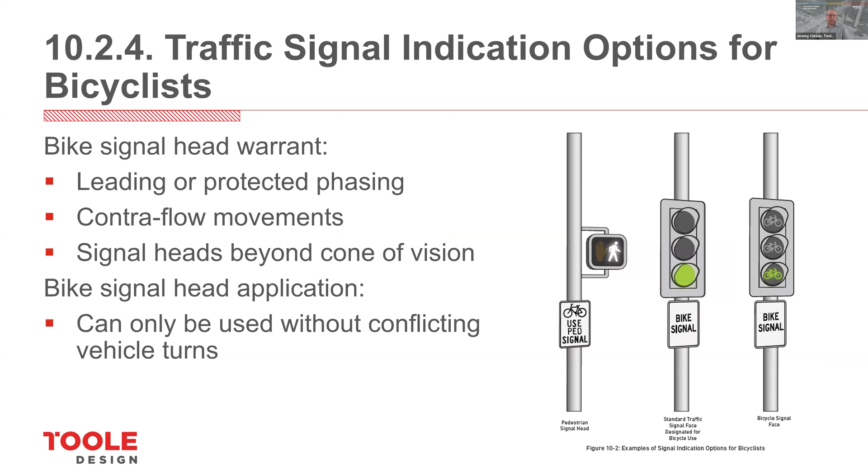Chapter 10 is traffic signals and hybrid beacons. So we give the different variations of treatments that can be used for controlling bicyclists. We provide some threshold volumes of right and left turning motorists across one-way or two-way separated bike lanes, and where the phase separation should be considered for those movements.

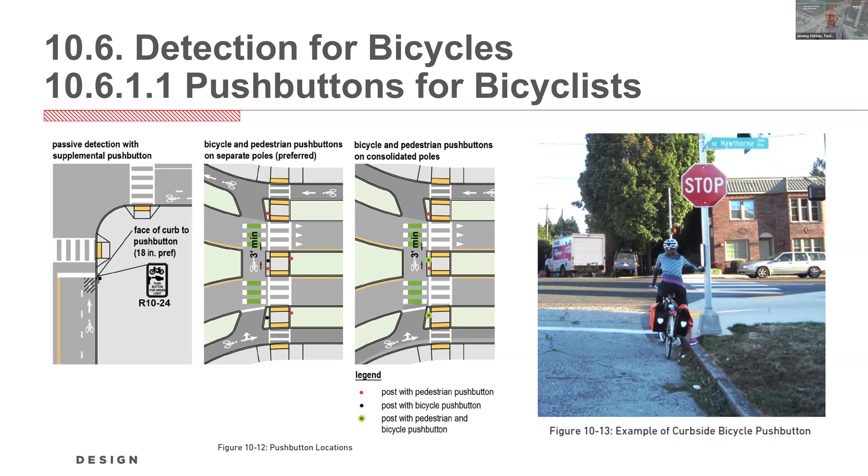We give some various options for the placement of bicycle push buttons, though we also highlight that other detection like loops and video detection can be preferable for bicyclist detection. You'll find all the guidance on red time as well as green clearance time for bicyclists in this. Some complex formulas, but it's important to be considering the speeds of bicyclists when timing traffic signals.

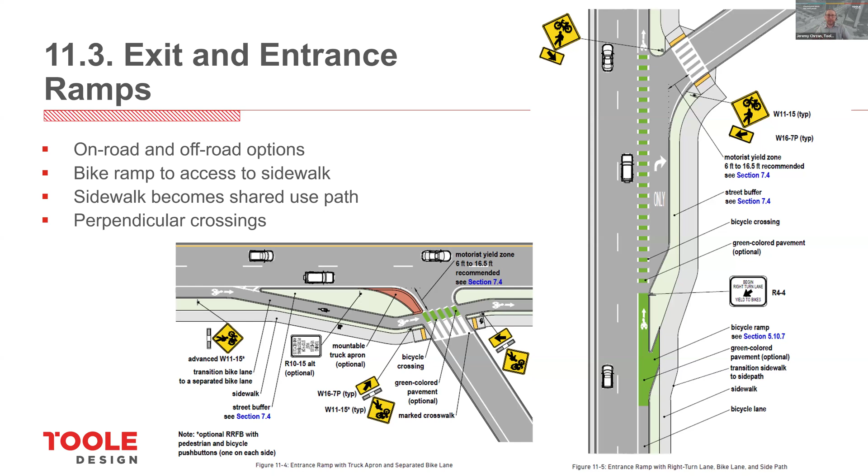Chapter 11 gets into interchanges and alternative intersections. So talks about how we should be considering the redesign of interchange on and off ramps to better mimic the intersection design principles that we discussed in chapter 5. And so again, we can deploy things like mountable aprons and alter the geometry to sort of make these intersections a little more closer to right angle as opposed to the high-speed slip lanes that we often see in these types of locations. Also recognizing that these weaving movements create some really challenging conflicts, and these might be locations where you want to give the option for the bicyclist to exit to an adjacent shared use path.

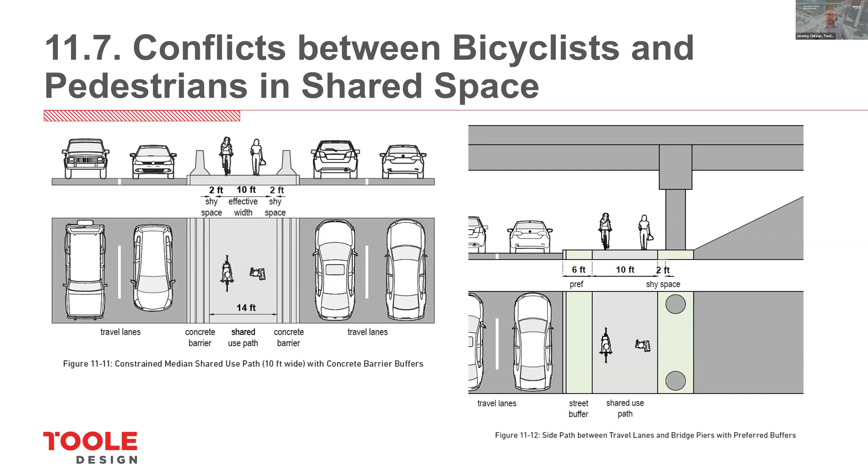And then also looking at some of these alternative intersections where bicyclists and pedestrians are moved to different spaces that are a little less conventional. How do we deal with those accommodations in those locations?

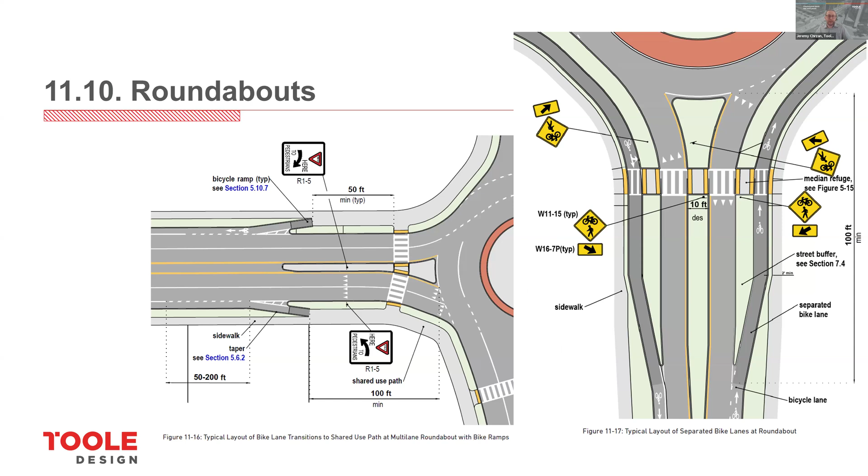Some thinking on how we approach slip lane design for the locations where a slip lane is absolutely necessary. So use of raised crossings, altering the geometry, et cetera, are discussed in this section, as well as the design of the approach of roundabouts and that option of providing the bicycle ramp so that they can exit, as well as showing how separated bike lanes may be accommodated at a roundabout.

Chapter 12 is going to cover rural area bikeway design, so giving you the widths that may be appropriate for shoulders based on the volumes and the speeds that are experienced on that road.

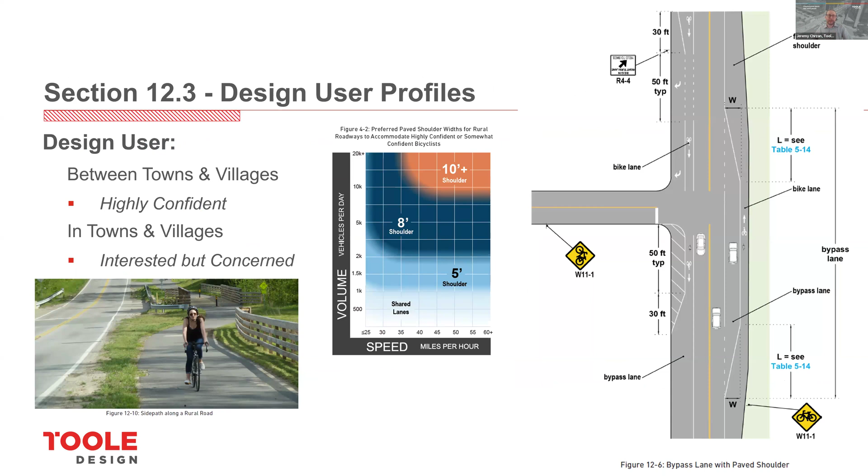We talked before about these locations where we are generally designing for the highly confident cyclist, but also recognizing that if there are clear community destinations or shared use paths that people are trying to connect to, we need to design for that interested but concerned user.

We also discuss advisory shoulders in the rural road section. Advisory shoulders are similar to advisory bike lanes, but are expected to be used by both bicyclists and pedestrians. And then we talk about the placement of rumble strips, so bicyclists operating in the shoulder can enter the travel lane if there's debris or obstructions in their path.

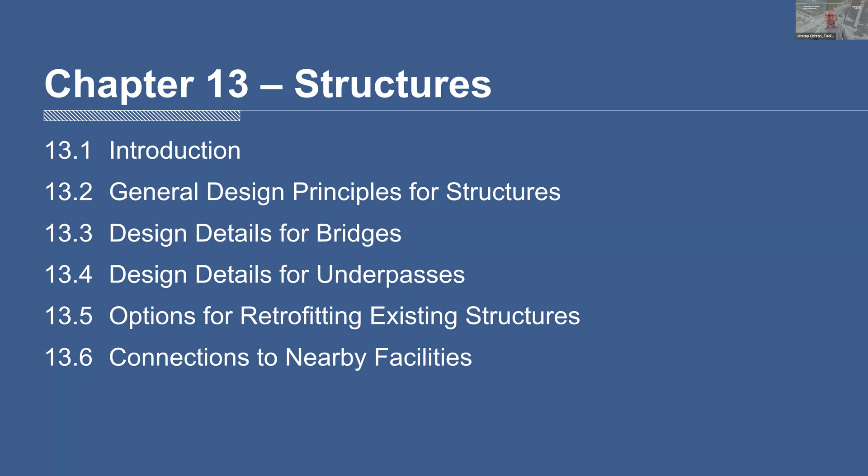Chapter 13 gets into structures. The main thing I want to stress is we really tried to drive home this idea that you need to account for the shy distances from railings and barriers on bridges and structures. So a 12-foot wide shared use path approaching a bridge should really have 14 to 16 feet on the bridge of clear space from railing to railing, so the operating width of that facility remains consistent.

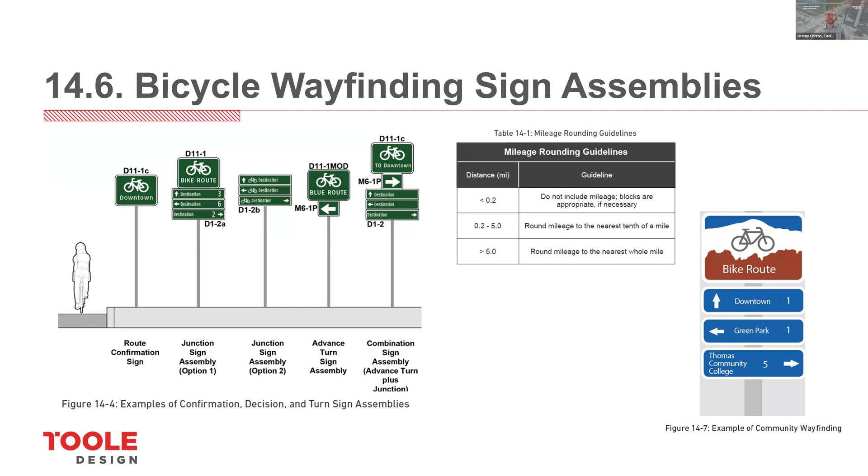Chapter 14 gets into wayfinding and the importance of that legibility component. So we have some guidance for the MUTCD compliant or standard bike route signs, as well as some of the more branded examples that we often see.

Chapter 15 covers maintenance and operations. As Cary said, something that really should not be overlooked. So we talk about the different strategies for maintaining these facilities and things that should be thought of during the design process to improve the longevity of those facilities.

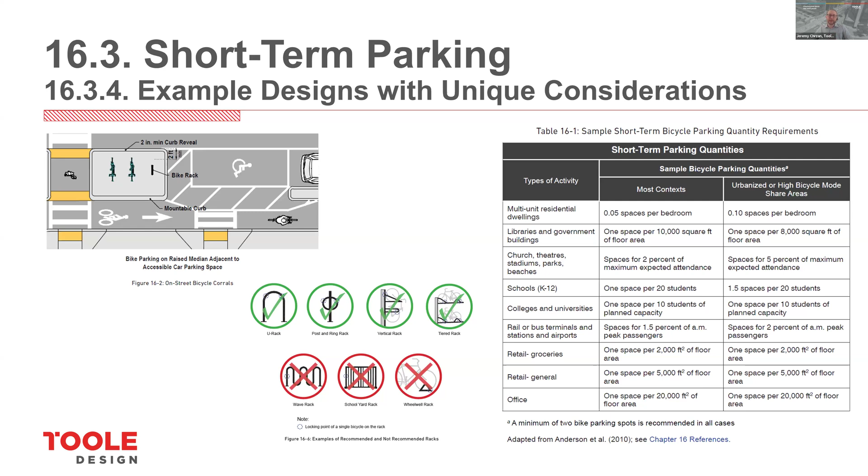And lastly, Chapter 16 covers bike parking as well as bike share siting and end of trip facilities. So showing how some of these facilities may be implemented in the street or in the sidewalk, giving all the spacing and bike rack types that should be considered and or should be avoided.